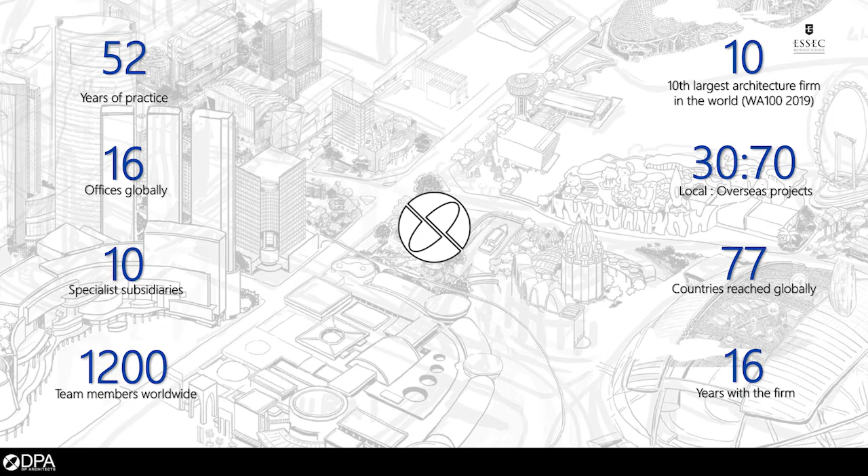So a firm of this size, in terms of reach and influence, close to 70% of our projects are actually placed overseas. I've been with the firm for 16 years. It's quite scary - sometimes you give this talk and start counting, and it's like, oh my God, 16.

It's incredible. Key part: these are our 3 key strategic pillars - design first, people partner, and one global studio. In terms of design philosophy, this framework allows us to look at design where we talk about the idea of drivers. You need leadership here, and with that, data is key. Then that starts to generate discourse, and most importantly, how do you master the tool?

Of course, we have measures in place to assess the impact of our projects office-wide. These are the people - I think it's important because behind every successful project, these are my partners. We have 33 of us, and these are the bigger family. This is a recent photo we gathered together to chart our way forward.

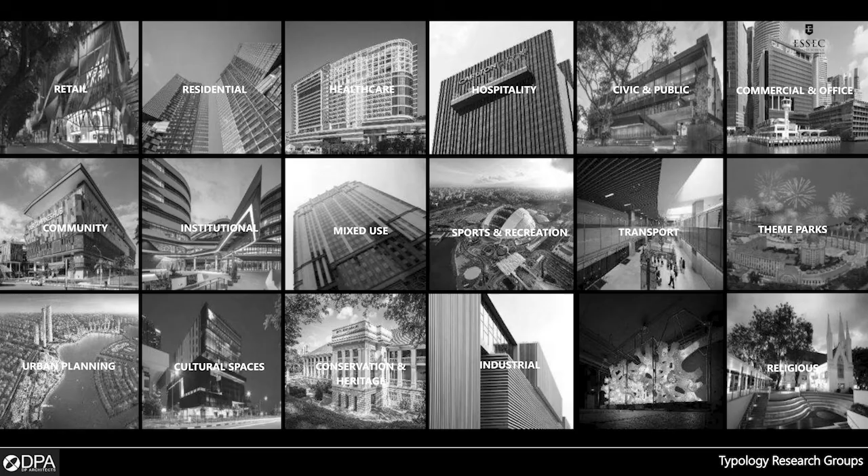I think it's important, as I said, to be multidisciplinary. It really echoes the importance of collaboration, especially in this day and age when we talk about design and the power of design. We have a whole series of expertise and typology - myself looking at sports and community, which I'll touch on again a little later. This is the footprint, but more importantly, the whole idea is to allow us to conceive from the notion of city all the way to the design of doorknobs and experience.

This is what we aspire to achieve, and these are our preoccupations now, which I'll touch on a little bit. These are also about a point in time for us to discuss how we look forward in terms of the few new decades to come - quite relevant subjects to many.

The digital part is quite key - this again is part of the foray by the office. But the very important thing to us, as I was sharing with Xavier, is it's not just about complex geometry, not just about the whole idea of programming intelligence, but most important of all is really that part of human dimension - the delight that this method allows us to create, work that actually brings joy to the users.

The other extension of me is SIA. I heard some of you have just landed in Singapore - this is not the airline, unfortunately, it's the Singapore Institute of Architects. I've also been with the institute as an advocate within the fraternity for coming up to 15 years. SIA in Singapore is the only representation of the architectural profession.

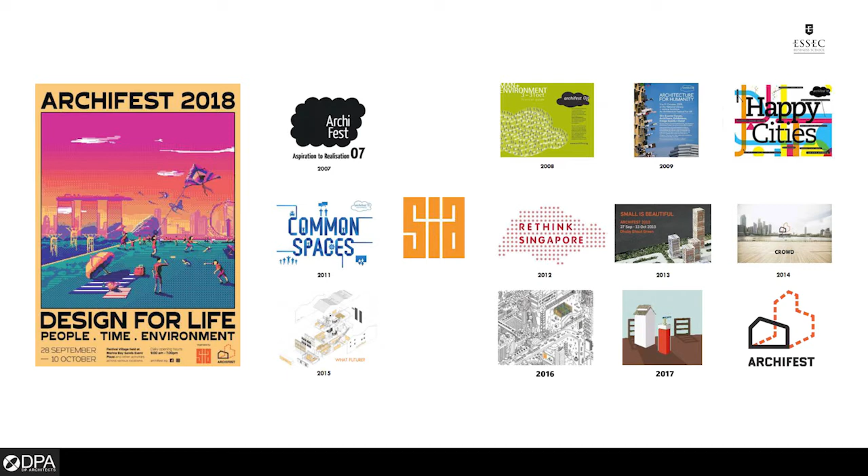One of the major events we hold for the city is its annual architecture festival - an event for us to celebrate and talk about the city, placemaking, and the community. These again are my council and team members this year.

A very important part to us is talking about the roles of architects - the relevance of how we communicate, not just amongst ourselves, but with all of you, whether in terms of business aspects or even just the man on the street - the idea and value that architects bring. Typically people will associate architects with design as the foundation, the technical skill set, and the part where we are agents to the state, talking about laws, public safety, public interest, and aspects of administration. But in SIA, we believe there are greater values where we deepen the conversation to discuss economics.

Architects are slightly different from, say, a cost consultant - we don't just talk about cost, dollars and cents. We like to discuss the values we bring to the table in terms of design. So that's another level which is important.

Environment, obviously, is quite key - the built environment or buildings itself attribute close to 11% of embodied carbon. So this is a very important part, and social is definitely the basis of our action. But most important of all, and very key - I would say this could be one aspect of this exchange that is very important - is actually the part on integration.

Because we need to make sense of all this requirement from client's brief, their budget, the kind of codes, the laws, the compliance, and all this kind of ethos, and make sure that we create something that is legible, that's habitable, that's also something that people will find joy in using the space. So this is one key aspect that is fundamental in terms of the roles and values that we bring in.

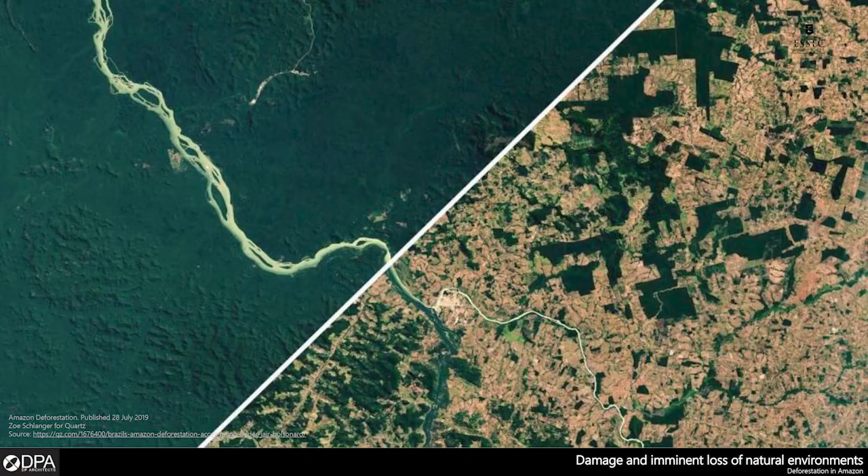So the kind of impact human behavior is having on the Earth in the years to come is major. Of course, comes with that is the heat that we are feeling, literally. In the Paris Agreement, we know there's a target to meet. And I thought one of the key messages that some global leaders haven't gotten is, regardless of what we are doing, the temperature is going to rise.

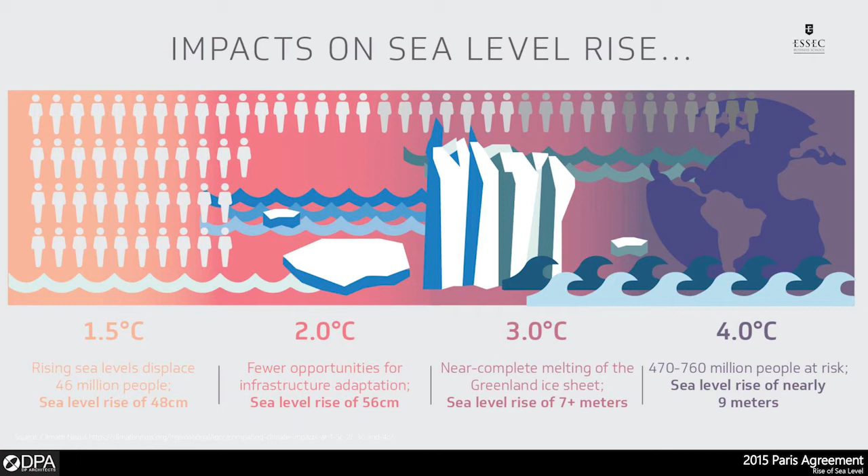And the idea is, if we fulfill our targets, minimally it's about 3 degrees. That is scary, because what is temperature to us? Just to give you a sense, when we talk about 1.5, the target by 2050 is to keep to about 1.5 degrees. We are talking about affecting 46 million people displaced by rising sea levels alone. So can you imagine when it hits 3 degrees, the kind of impact on the global citizen is phenomenal.

So, very serious subject. But back home, we are also aware that there's a change in the mix of demographics. I don't think it really applies to this group yet. The idea is, currently 1 in 8 Singaporeans are above 65 years old.

In 2030, it's 1:4. All right, so maybe if you add another 30 years, I think still there's a gap there. But it's real, and this is a key conversation we need to have in terms of the challenges with that graying population. Digital is key.

And of course, when you talk about 2050, there's always the part on new intelligence—beyond AI, the kind of communication, the whole notion of connection, human interaction. But coming back to even the present state, this whole idea of technology, the whole idea of hyper-connectivity is already creating an issue. We are ever so connected, but yet not present.

So this whole idea of isolation, of alienation in relation to the advance in technology is already something quite real. And worse still, there are figures, national leaders, talking about archaic methods of further division and divide. So these are really serious issues in terms of context if I'm addressing future global leaders that we are facing, besides that part of excitement and positivity.

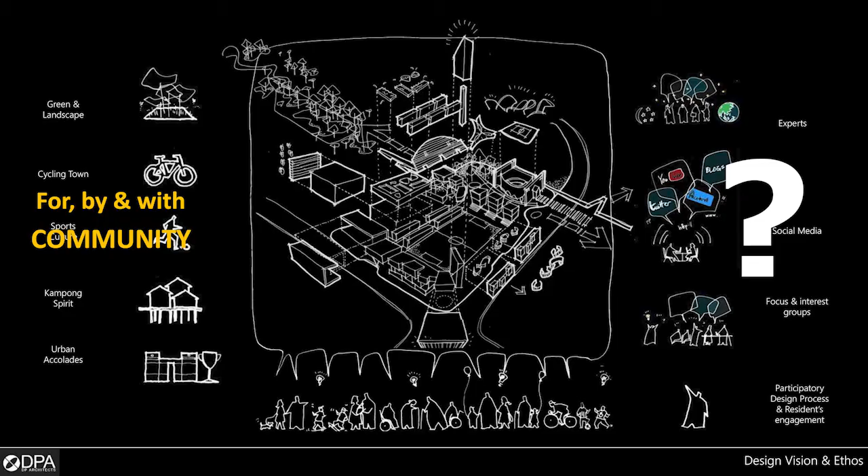So this is the grand opening, brought all the residents together. Usually, the idea is VIP, you invite ministers, some politicians, but this is where the residents become the focus. So there is already a very intentional way to shift away from the whole idea of how we start creating a community space of this nature.

And of course, there's a whole host of engagement, very intense. We went through one year of very intensive engagement, from roadshows, you see typically in some of such events, all the way to block parties. Block parties - you know, we stay in public housing, so it's by per block - to even floor parties, going by per floor. So very, very fine grain.

And of course, there's interest groups, focus groups, social media websites, forms of engagement. This is really showing the evolution of how, in the end, eventually the hub was conceived.

It's interesting, when it first started, the project was about 4 stories - just to give a sense of density. But after various engagement, it started, I think, with 7 agencies. Everybody wanted to come together, so it just kept building.

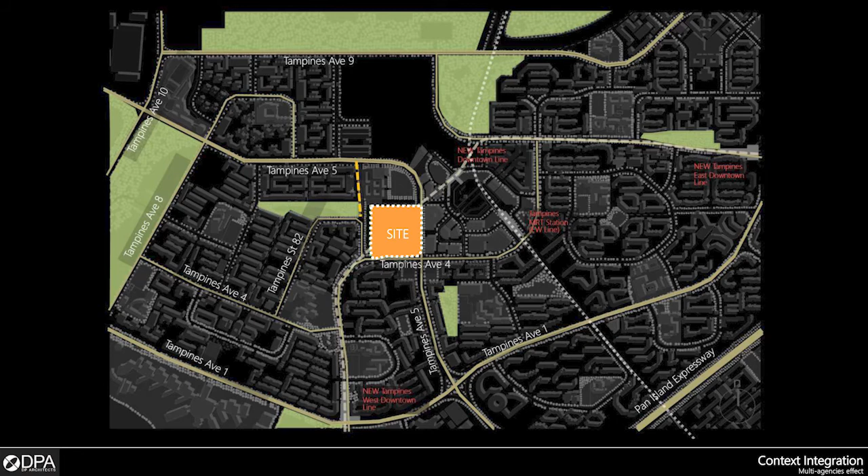And of course, we shared about how it operates not just as a site, but understanding the whole entire network. It has a main space, all right. One of the key focuses is how it talks to the town - it's on porosity. This whole idea of an open ground floor, or areas on ground, given priority to social or community programs.

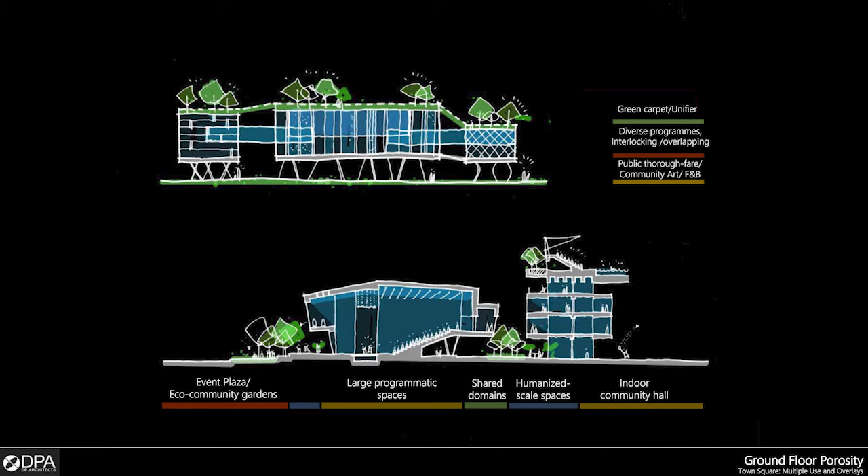Because when 12 agencies come together, it was quite difficult - everyone wants a ground floor entrance, naturally. When you have 6 stories, they say, no, I want the first story. So in the end, none of them got the ground floor. Most of them got the second, and we worked based on the community's focus angle.

So the idea of the ground floor is only for social programs or primarily for the community. There's some retail, but in terms of retail footprint, it's about 15% of the overall floor plate. So that itself has already shifted from the typical idea of maximizing commercial interest and frontage.

And interestingly, I think this is also a kind of human behavior. In several of the engagements, many of the residents in Tampines shared, can we not see another shopping mall? Because actually Tampines Regional Center, if you visit the place, has a lot of malls already. So their first instinct, they know this is big, they say, hey, we want something quite different, the whole idea of big space versus something intimate, idea of flexible usage.

So the first event was actually, the whole idea of the square is part of a FIFA 2-star football pitch. They have massive yoga, of course they have clubs, they even have a concert, the first concert out of a city center within the heartland. The idea of how it works as part of the city was very important in conception.

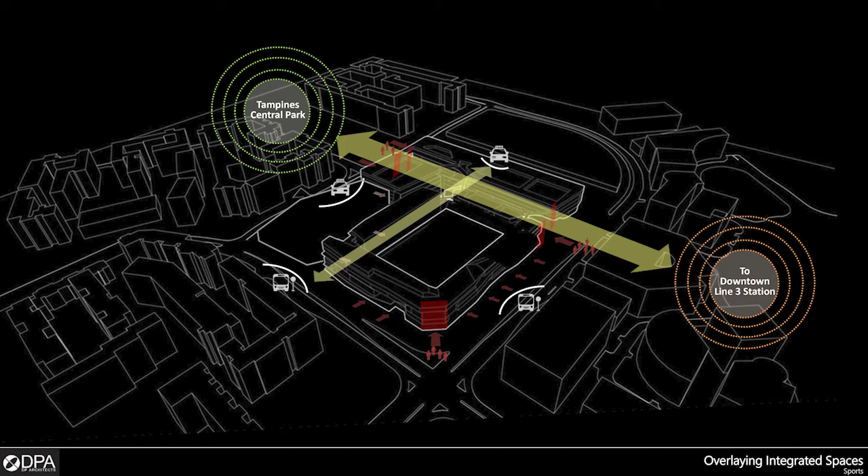Again, how it works, it brings the street into play. There is a main street that connects the downtown center to the central park within Tampines. So this is the street that we create, sheltered but naturally ventilated. If you have a chance to visit, through different digital means we are able to simulate and make sure that this environment is conducive, even without aircon.

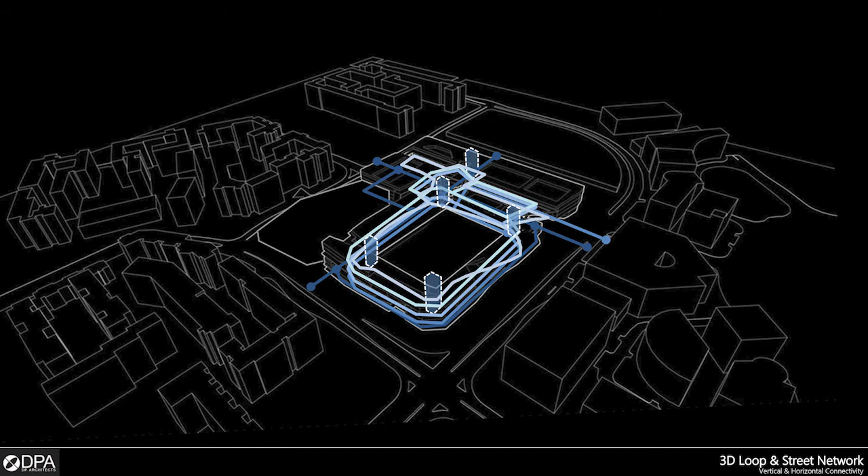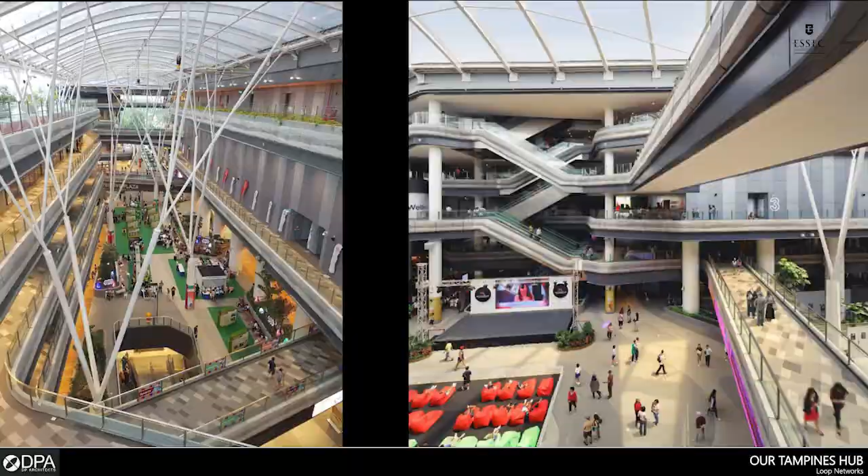So the idea that it captures various movement and in fact segments of life is something we thought is quite powerful. And this whole idea of movement is multiplied 3-dimensionally as a whole array of network throughout the entire site, of link bridges, of connectivity that strings the various programs together, right into a plaza space in the center.

It's a combination of various diverse programs. There's civic, cultural, arts, there's community, sports. So within the site, this is really the whole idea of creating not just a place, but a place of many places, right? And these are the whole host of programs right under that.

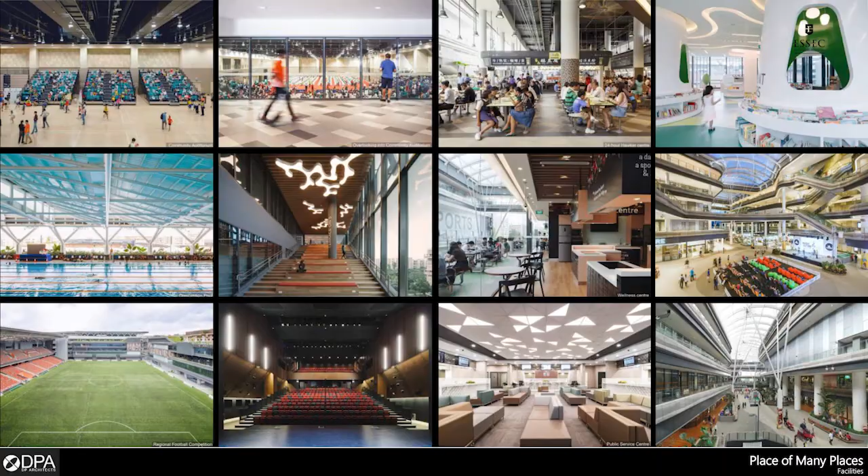And in spatial form, this is the kind of environment that we need to create, quite bespoke to each of the segments or the user group. But very importantly, the whole idea is not just to look at them in isolation.

In design strategy, we move away from the typical stacking of floors and look at 3-dimensional clustering of facilities so that we maximize dialogue, to say that even in this room, I'm quite aware of what's happening next door. So what we believe is by maximizing spectatorship, you also encourage participation.

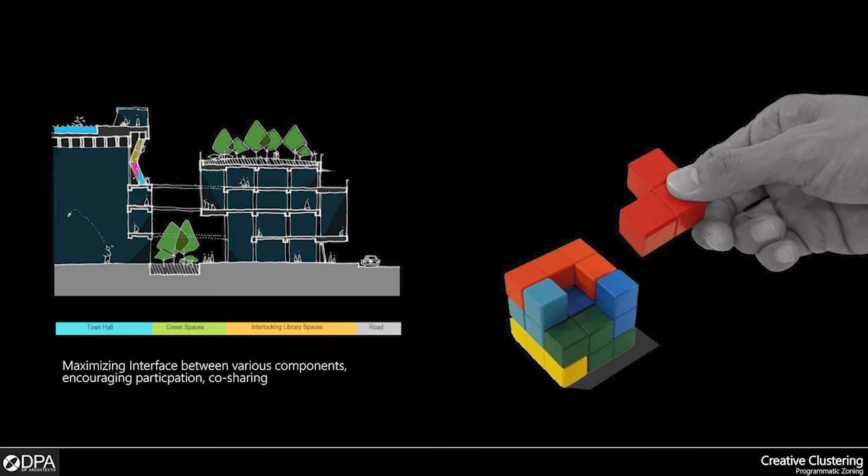So the whole expression describes this 3-dimensional dialogue. And in a spatial way, as I said, you're constantly aware of what's happening in the other spaces. This is also quite key.

So the whole idea of various spaces that we're creating, this is where we brought cooking right into the library, all right? Because we think that you can get your recipe outside, but this is actually a space that doesn't belong to the library stakeholders.

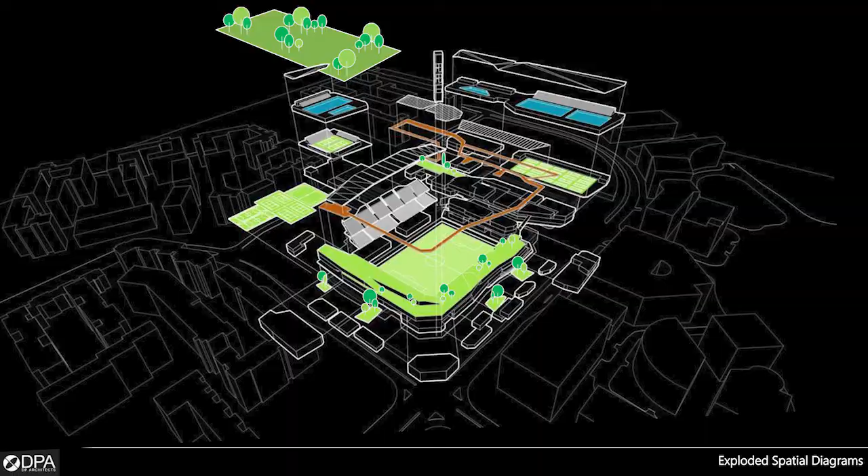So this whole idea of synergy is taking place, bringing green. So again, a whole assemblage of this idea of environmental system, the users of spaces, rooftop jogging track, rooftop pool, and then very importantly, through this integration, it also allows us to harness the system as a closed loop, where the solar energy from rooftop can be used for the basement car park, and the food waste is converted to fertilizer that we can use for the community farm.

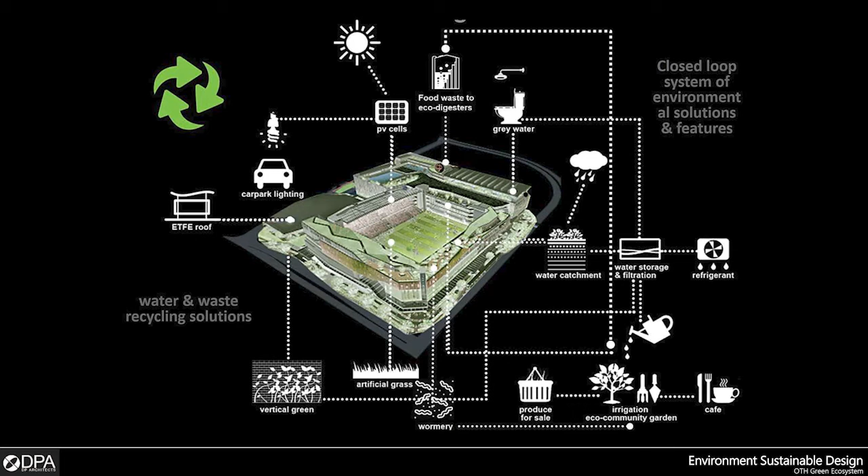So hawker center, key space, so some of the simulation, so quite a fair bit of technology is embedded, not just in terms of the design, but also the operation, where we talk about food waste converting to fertilizers, all within that space. So the whole idea is once that purpose is set in place, all the kind of support in terms of technology starts to make sense, right?

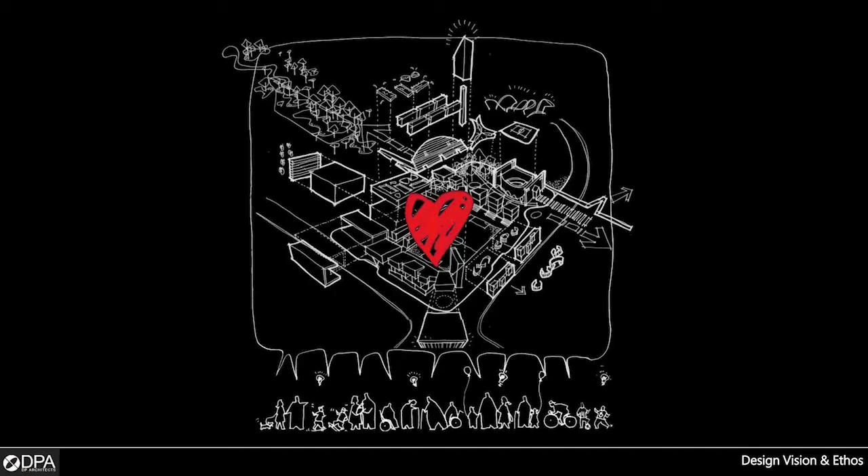So in terms of various manpower, lean or productive methods, robotics, and even performance-based approaches where behaviors are analyzed to help generate further data, the key thing is really going back to the people.

The whole idea is not just physical gathering, but social media too - the cool part is it has a lot of participation. One of the most encouraging things since its opening is that each year, last year, it saw 18 million footfall. So in Singapore, 18 million to a community space is equivalent to an airport.

Very interestingly, based on usual statistics, in most of our community spaces the minority races, like our Malay community and Indian community, are very low - 2%, 7%. But here in OTH, it went up to combined more than 40%. So it's starting to change behavior. This is where we talk about that synergy of 1 + 1 can really become more than 2.

And the latest, it was quite funny - we talk about the concert. We even had army boys, first time, not within the camp, but they came out of the camp to the community for the passing out. And then, of course, Ronaldo was here, but he only had 300 fans. This is the man, Ip Man, if you watch the movie - he drew a 5,000 crowd, the whole space was packed. So the whole kind of diverse inclusion of activity is really what this infrastructure supports.

And this is one of the key ministers behind this project. He says that the project itself really starts when the building completes.

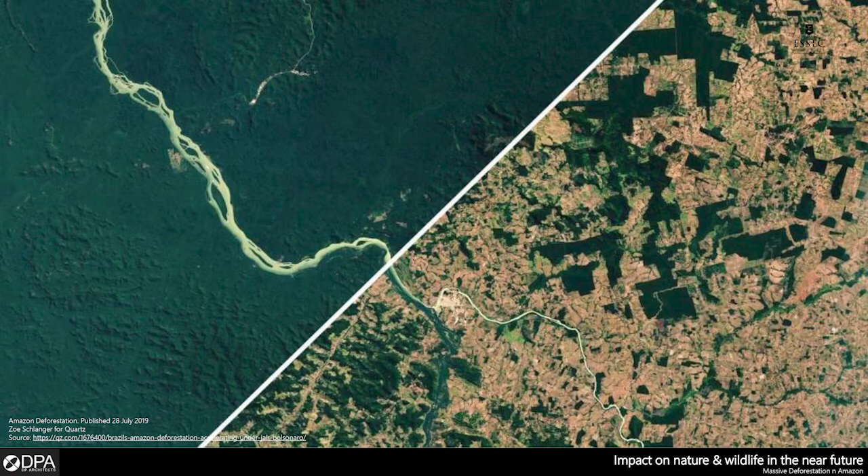And then, as an extension, there's another hub we are doing - we talk about the issue of deforestation. In Sembawang, a hub of a totally different nature is also in the planning. This is within an 11.7 hectare site of an existing park, so we were told to look at an integrated hub too, but in this case we can only build up to 2.5 story height.

So the idea is respecting the topography of the hill and the existing trees. Within the building there is also a national monument that used to be the House of the Admiral during the British colonial days, which has a vantage view towards the naval base.

Quite an incredible project. So again, it allows us to start questioning the potential of how we look towards the future, with the knowledge of the past and the current, really how it allows us to start discussing what could be, and bigger subjects like the divide of what's green and what's hard, or the city.

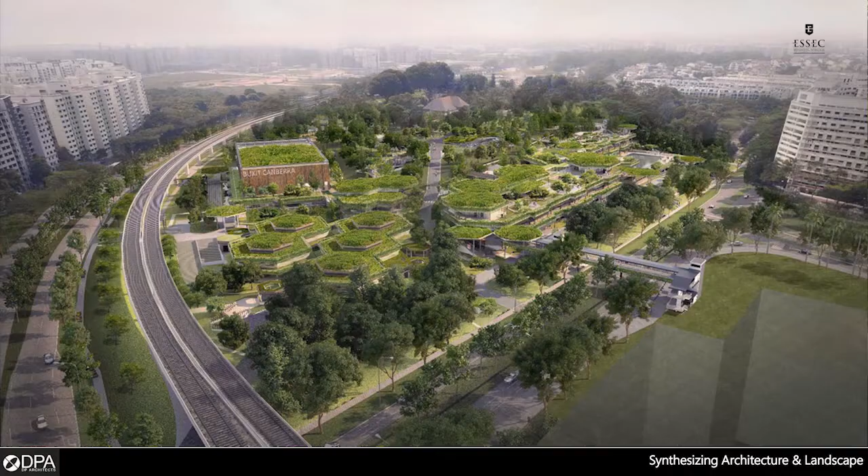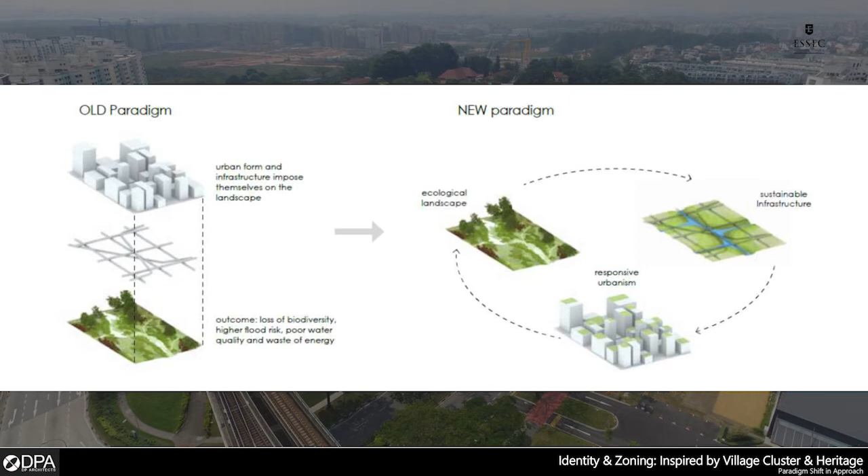And this is the result of that imagination - it's called Bukit Canberra. The idea is really creating, again, not just vibrancy but accessibility, while keeping this whole park setting. I would say the major paradigm shift is: instead of taking a building and putting it down then planting all around it, in this case you start with the green and plant the building around the green.

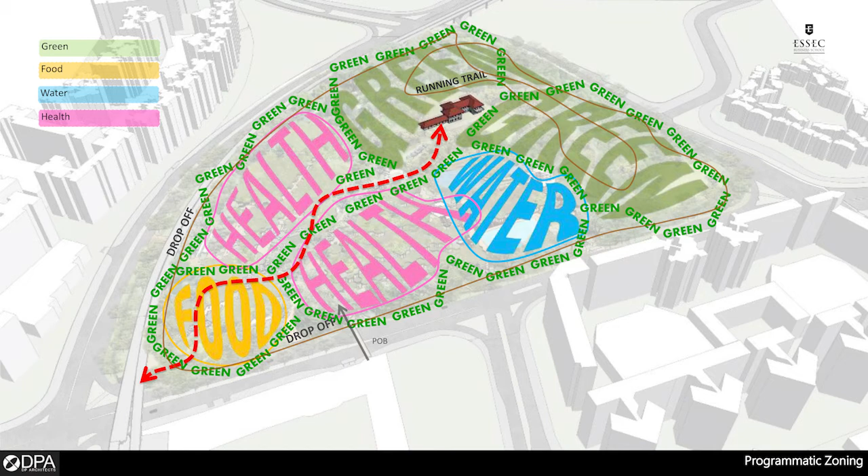So this is the site looking at its larger impact in terms of the larger green network. And within that, program is key - 4 key programs. Green is already the basis, the asset, with the idea of bringing water, health, and food. So the idea is a program creating various clusters, not by agencies, but more by use and nature.

So there's a hawker center, the idea of a pool, the notion of even a polyclinic, a healthcare center for seniors, and the idea of even farming and outdoor space. So the idea is creating networks not just for human enjoyment, but even for butterflies.

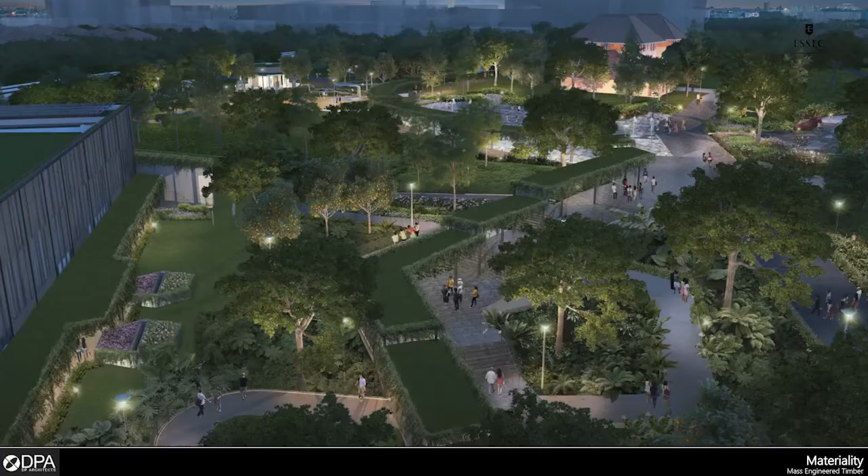So this was our task - trying to retain the trees within the site. And then, of course, the building footprint itself is 100% green replacement - whatever land we take, we replace with green.

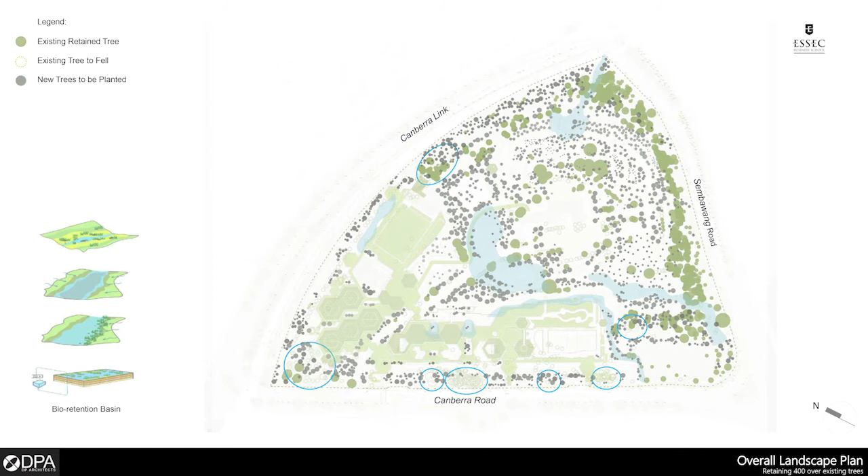And then water, and very important, replanting. So we are replanting 1,600 trees back to the site, further intensifying that kind of green. And of course, with that, key thing related to this, it's really the whole kind of setting that we create for the community, but also the larger biodiversity that it starts to generate.

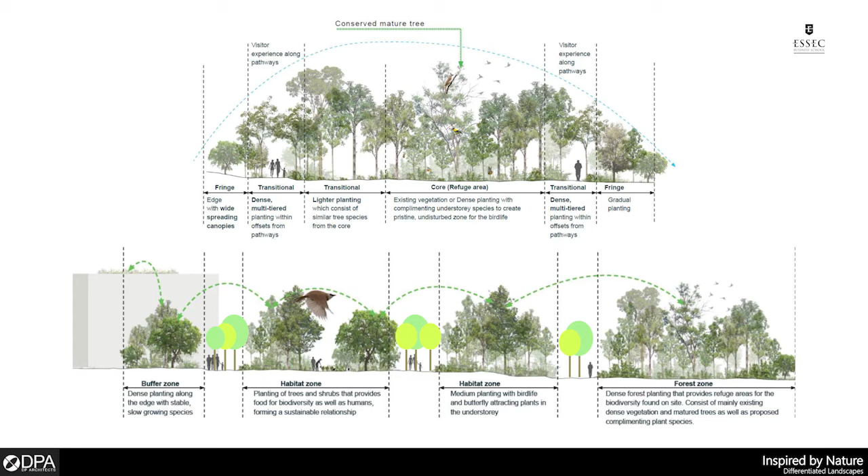So the idea of each of the layers and stratas, and then not just where the site doesn't have buildings, so the building itself also becomes the infrastructure for all these different species to continue to grow and kind of evolve. So geometry-wise, we took on something quite different.

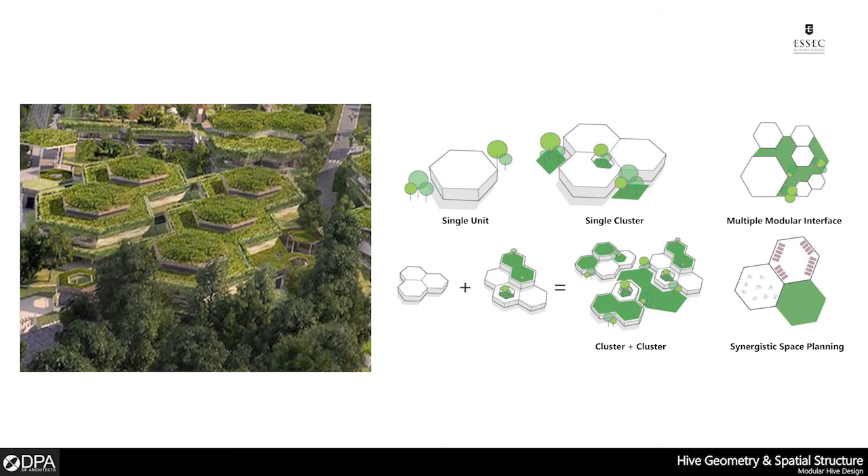The idea notion of hexagon, which is also a geometry from nature, actually works well for more interaction. Exactly like this hall. This is me and you, but when we create a spatial setting that is different, you create multiple interfaces for dialogues, right? So this is the building in place. Hopefully it will turn out like that, right?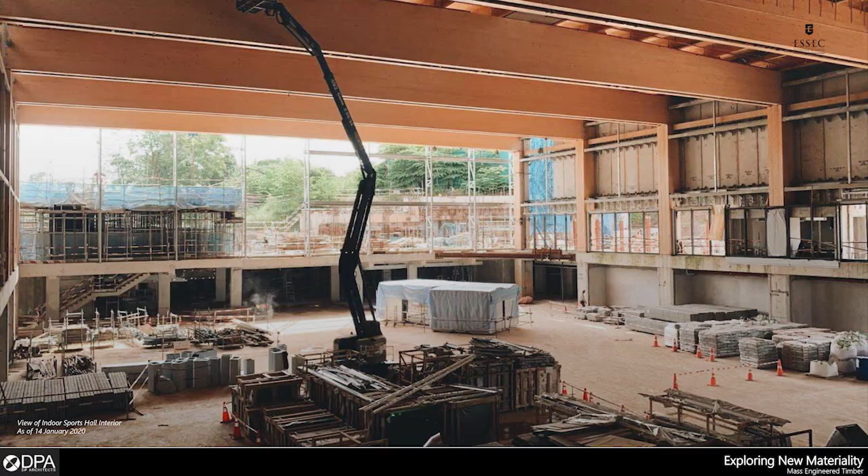So one of the key gathering space, important thing is also in design to push for new technology. This probably in France, it's common, but in Singapore, this is the first few timber building. Here we call mass engineered timber. Of course, construction ongoing, something quite cool.

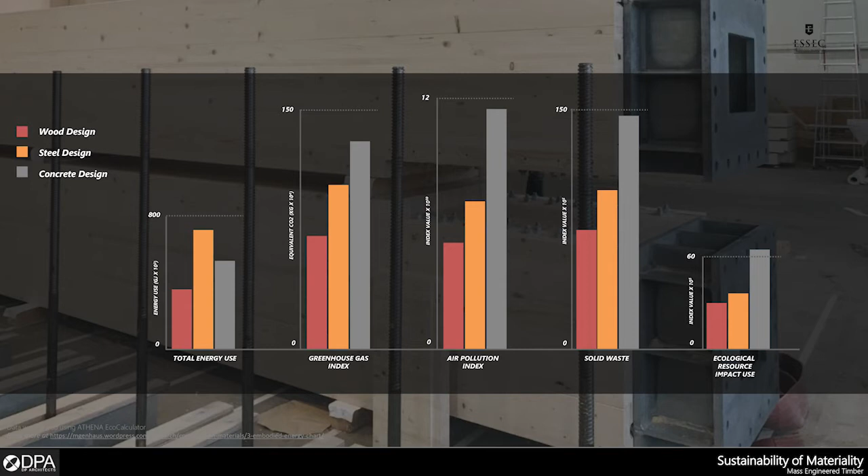Itself, I think in materiality, in terms of its energy consumption, greenhouse emission, pollution, it's one of the most sustainable sources. So itself, it's also this foray for us to go into the discourse of what's the kind of right building material to cultivate the kind of value to the community. And technology has already proven that towers can be built with timber too. So not sure next time when you visit Singapore, you'll see a timber tower.

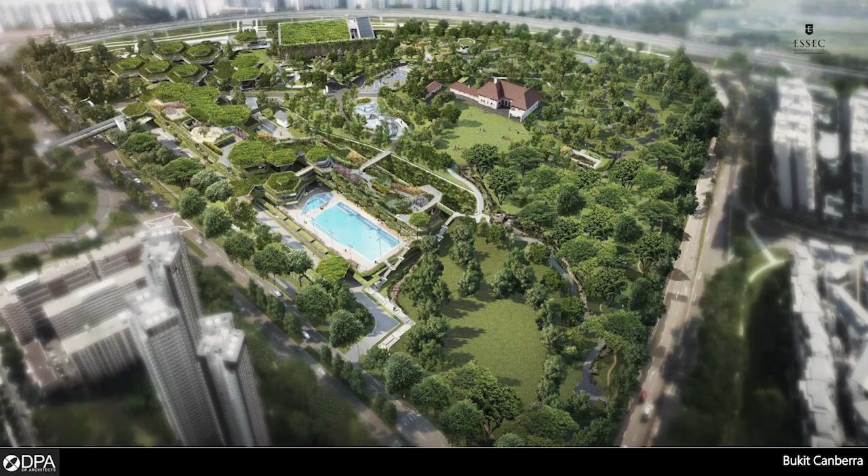Of course, biodiversity is key. This is really the ambition. This is during the competition what we put. Year zero, we create a building, but create the infrastructure for the greenery to start creeping in. And then of course with that, right? And then really coming back to the community.

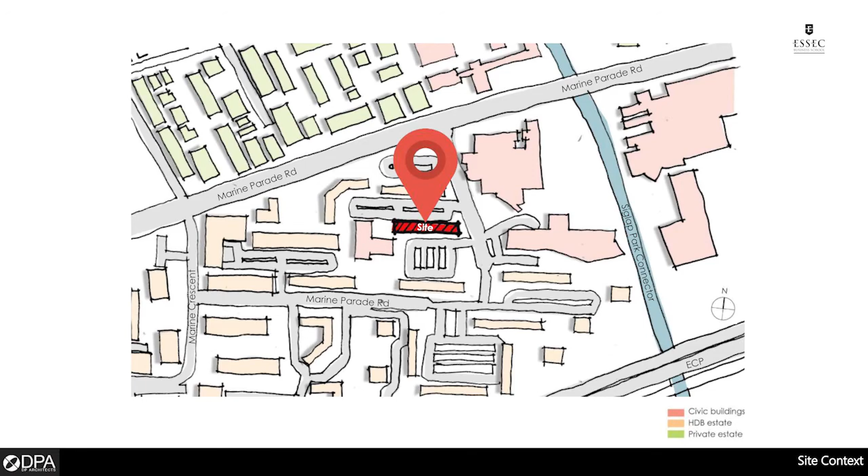And then of course there's the sad case of suicide and issues of them kind of passing on at home. Key thing was also questioning a social welfare kind of method, where many of these seniors, there's good intent. They bring food to their house, all right, they give them pamphlet. But the issue is then they don't even need to step out of their house. This is where design, we need to look deep into the subject, all right, of what the whole concept actually address.

So this is the space. Idea is really true, very important, the agency of food. So something I hope you enjoy in Singapore too. All right, bringing the community together.

It's really true that to shift the perception or the role of these elderlies from object of charity to stakeholders and leaders. So here, they are not just given food. They are the one who prepared the food for one another. So you're instilling a role in terms of just the design of a simple center.

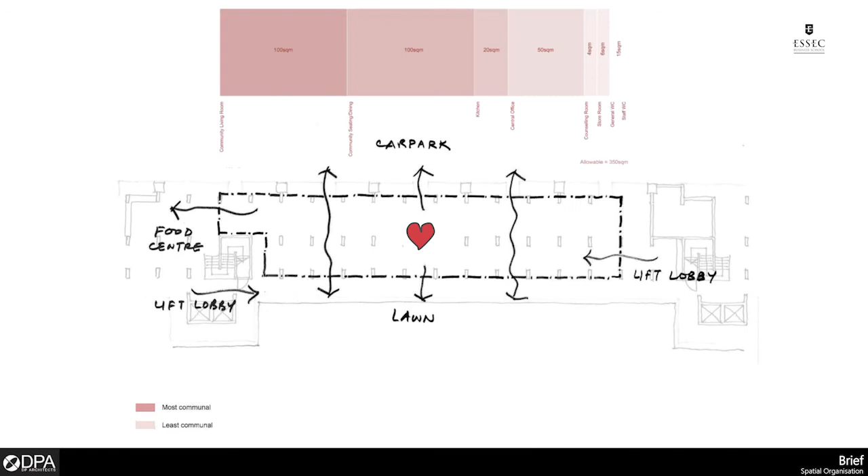So in design, porosity is key. In the center, that's where we place the kitchen, where all the activities revolve around. And then the whole idea that, you know, most of the centers, I'm not sure in France, how is it like? It's either glassed or gated. So it's a bit like fish tank, you know, but a different context, fish tank has different connotation.

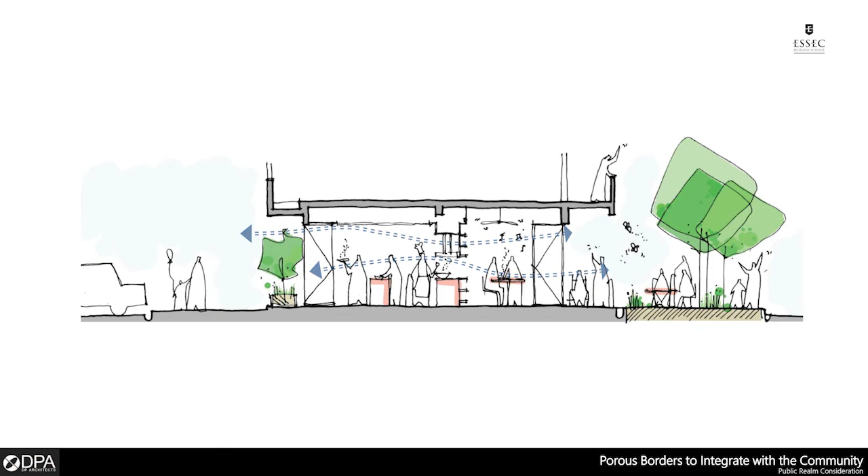So the idea that, okay, we wanted to break this idea of definition of threshold, and the design inject a whole series of doors as the very facade. So the facade is designed as an array of doors that's all open, and it creates this notion of porosity right through. And this is where the common area and the specific area are.

So this is where you start to blur boundaries and you dissolve stigma. Otherwise, you'll say, hey, this chap going in, maybe they will need some help. So the idea of how we blur the boundary is key.

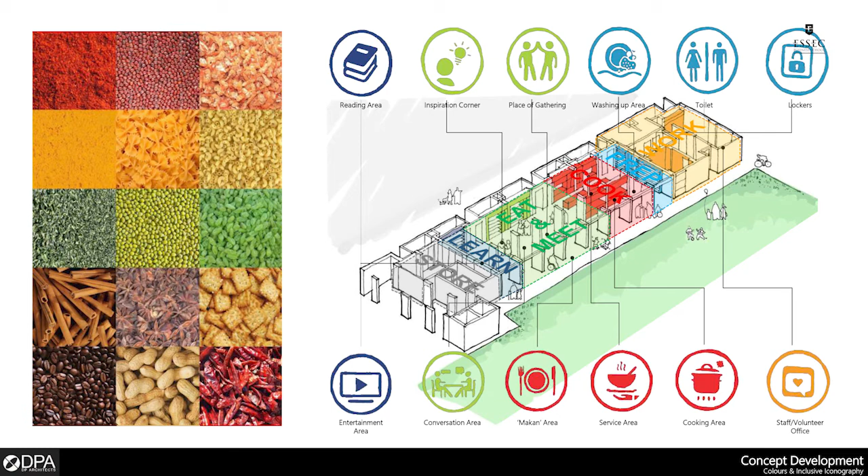So how we communicate - this is always a story I love to tell about Uncle Louis. When we first conceived the idea with the client, a social welfare group called Montfort Care, they went to Uncle Louis and said, Uncle Louis, come down, let us help you. His first, of course, natural answer was, no, I do not need your help. So after the design idea further germinated and progressed, they went back to Uncle Louis and asked him, Uncle Louis, can you come down and help us? He said, yes, I'll do that.

So the power of design in instilling ownership, the whole idea of leadership, and the whole idea of dignity is fundamental. The cool part about it is I'm currently working on version 2 of Good Life. Something fun, just a snippet, is looking beyond the center at how you address community support and the whole idea of future aging in place. Many seniors will go to a nursing home, but part of our hypothesis is that if the community has enough support, you can create a robust support system that allows many of them to age in place.

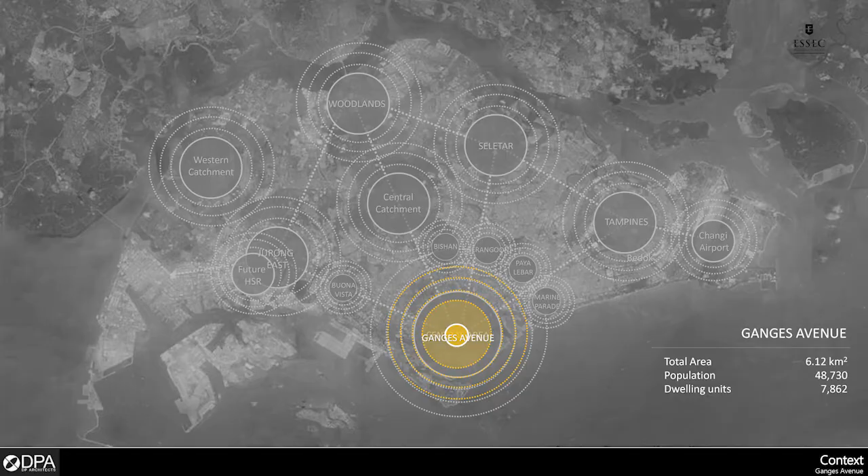Another group, from old to young - this is what Professor Xavier talked about, a youth charity we're working on. It reaches close to 1,500 youths annually. We went to see their building, not as beautiful as your campus - many of you, if you come as a youth volunteer, will know what your first reaction is. This is an existing commercial building by our Housing Development Board; they gave them a unit. So we went in to see, and this is the space that we had.

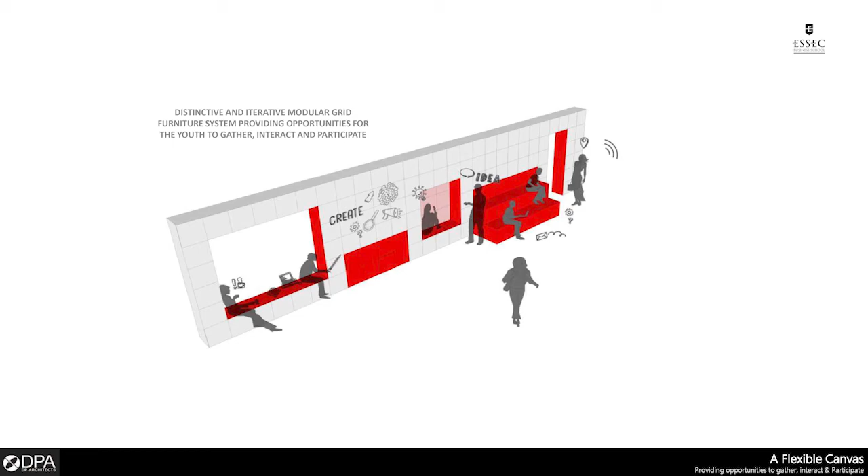So we thought, using the concept of building blocks, we could develop a system that creates a whole palette for the users to start shaping their own environment - empowerment through design, with a whole array of language tied to their values and principles to create a new environment for the spaces.

So the foyer space, coming back to their so-called training room - in the brief it's a training room, but we said, why don't you create a big gathering space that you can close up and allow participation to take place. The idea of these modules sets the basic framework of the entire space, with a lot of walls for dialogue. These are actually sound absorbers for acoustics, but we designed them as origami that carries their idea of logos and principles.

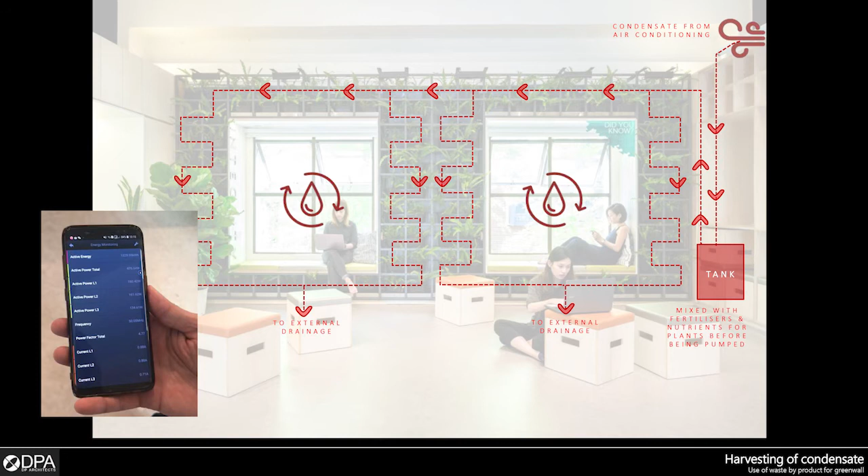In terms of green space, each of the youth volunteers is supposed to adopt a plant - the whole idea is that through a space you cultivate a behavior, and then teach them and impart values of life. Part of the system, because the budget was very low, we innovated to take aircon condensate and collect the water to water the plants. We also worked with a partner, ABB, to digitalize the systems so they could track their own real-time consumption of energy. So it's the space itself, the setting, and the community coming together.

Last project - in terms of reimagination, I think this is one of the smallest projects here. It's at Jurong East, the western end, and this is what we call Project BS - not that BS you know, it's Project Bus Stop.

Important, I think a key idea here is really looking at the future discussion of mobility, which is quite scary. Based on data, coming back to our idea of 2050, in India alone they are constructing 40 kilometers square of road daily. So by 2050, I saw one number showing more than 3,000% increase in road for vehicles. So this is real, as we talk about the evolution of technology and transportation.

Part of the studies here was this very interesting scenario in Nigeria, where close contact between humans and this machine of transportation becomes something we thought about. Even when you talk about conception of the future, the idea of man and machine in terms of movement and mobility is always close in discussion. This is where we really look at how community or social participation can be a part of changing the way we understand transport infrastructure.

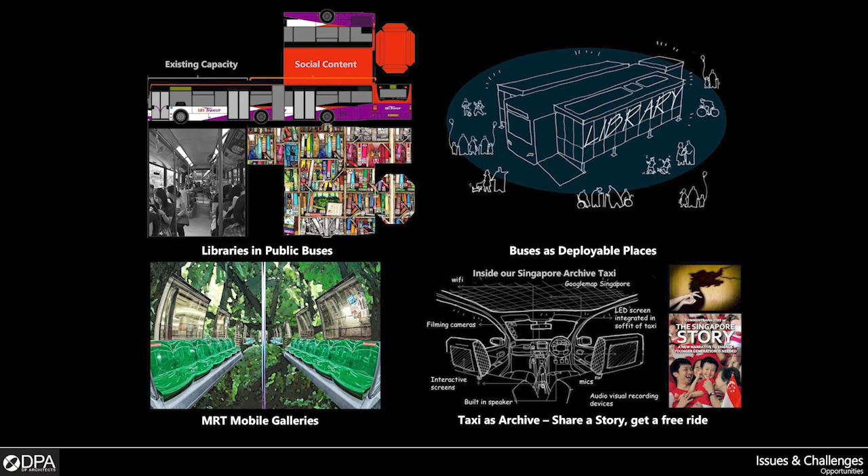It was a whole array of exercises that I did with some students. I said, okay, let's test bed what are all the things we can do in terms of future transport. The idea of adding libraries to it, allowing it to install on site, converting it to a gallery, and then maybe even doing game shows where they share stories.

With the agency, they gave us a site looking at a bus stop. So whatever happens, one thing will never change, even at Grab—when we talk about future transport, the notion of time is critical. So to us, the main exercise was how can we make that part of waiting, which can be quite excruciating, into something that could be quite delightful.

So a very simple exercise, and this is looking at impact. Daily, close to 4 million Singaporeans travel on the buses alone—actually the figure has already exceeded 4 million. That is our target users.

And in terms of sites, we have close to more than 4,500 bus stops. So this is our whole concept of site, not just that one bus stop we are looking at—this is all the bus stops around Singapore. This was originally what the bus stop was, and the whole idea of the reimagination is taking this, introducing various components and recreating it as a kind of social landscape.

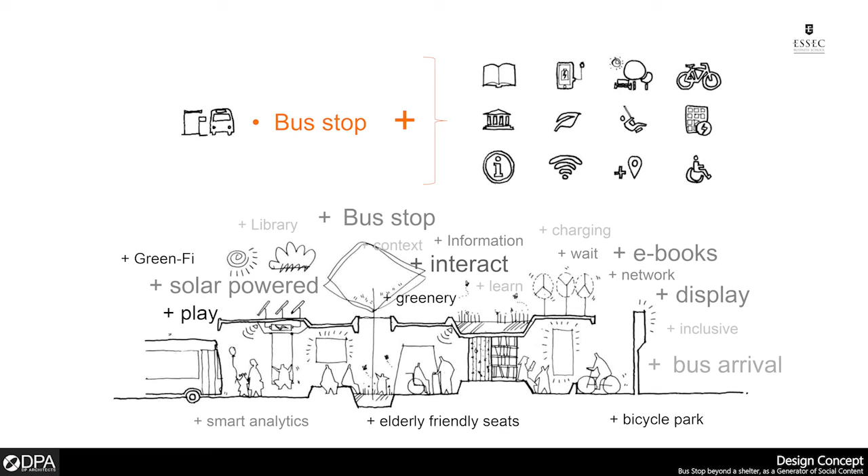So you inject a social dimension into something you typically see as just a tool. Of course, the things that come with it—this was a prototype project that they tested for a year. Unfortunately if you go there now you can't see the bus stop anymore. It's about looking at a kit of parts, how we attach various components, test bedding it, and allowing it.

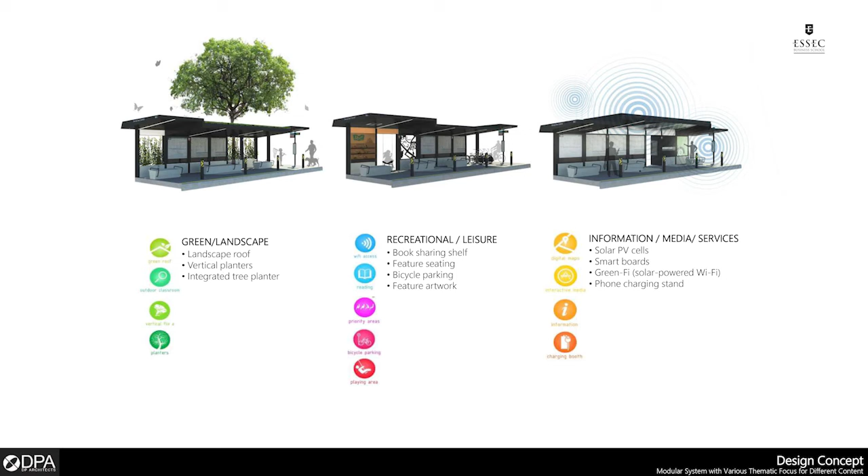What is quite key is it allows you to create your own kind of bus stop. Say if you're in a park, you can bring trees, rooftop garden, all the way to something a lot more media focused. This kit of parts allows the community or the residents near the area or district to really partake in shaping it.

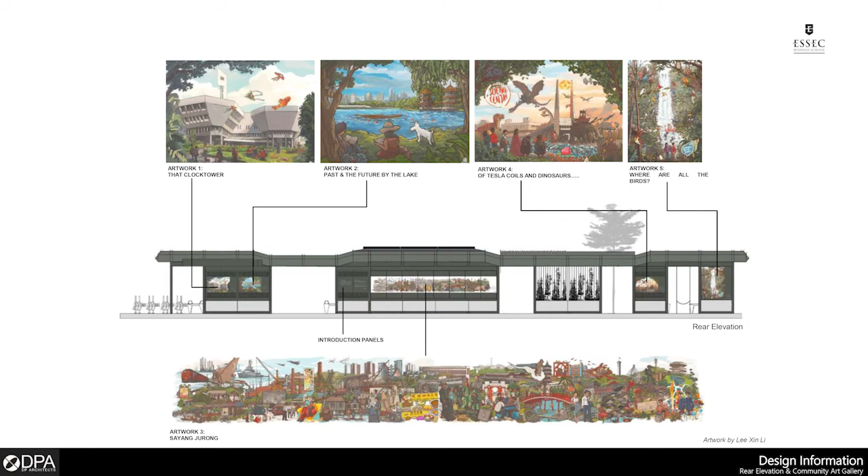So this was solar cells, and there's Green-Fi, solar-powered Wi-Fi that we were test bedding. There's also a mural done by local artists to tell the story of the site, and real-time intelligence in terms of bus movement. We even brought a library to allow sharing, but there's also e-books within that—so there's a physical experience coupled with a kind of digital enhancement of that enjoyment.

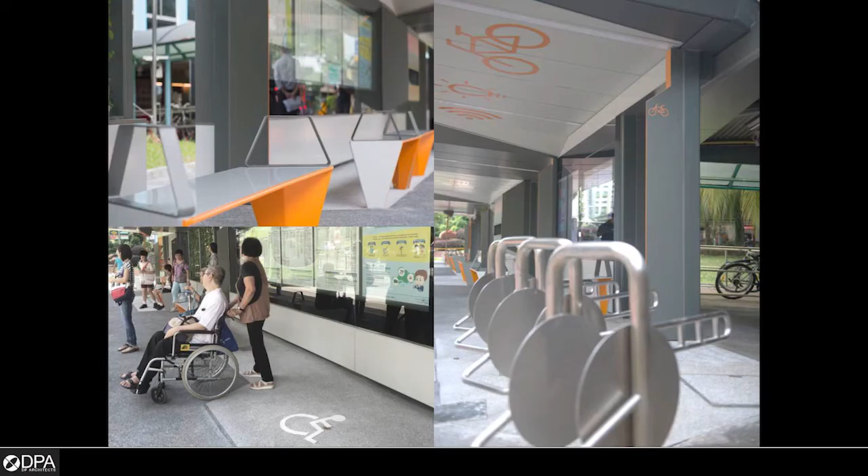So these are the various kit of parts—this was, I think, 2016. The phone was still charging that way, but that was the idea. You could see the various users working with it, looking at universal access. What is quite delightful is it started a whole conversation, not just locally but even globally, about the importance of looking at bus stops as an extension of your social spaces.

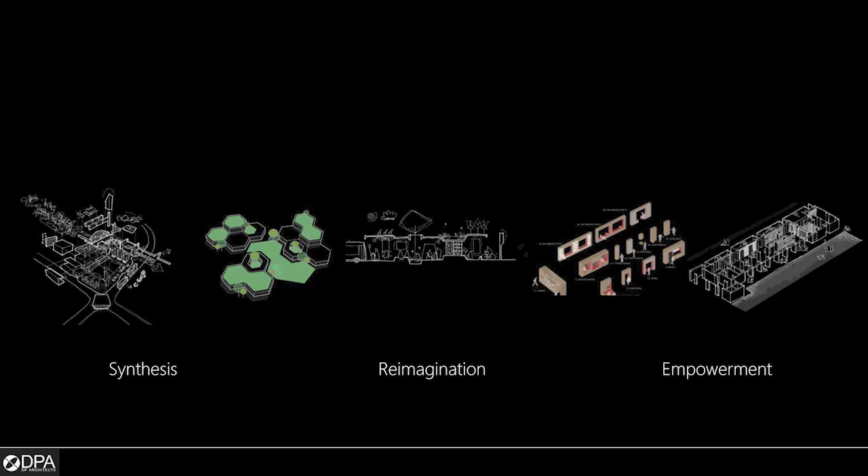And then, of course, the swing. This is a summary of what I shared in terms of harnessing the capacity of design in synthesizing all the various dynamics, looking at the way it allows us to reimagine our setting, but most important, going back to the human and social capital of empowering the users, across the various spaces we talk about.

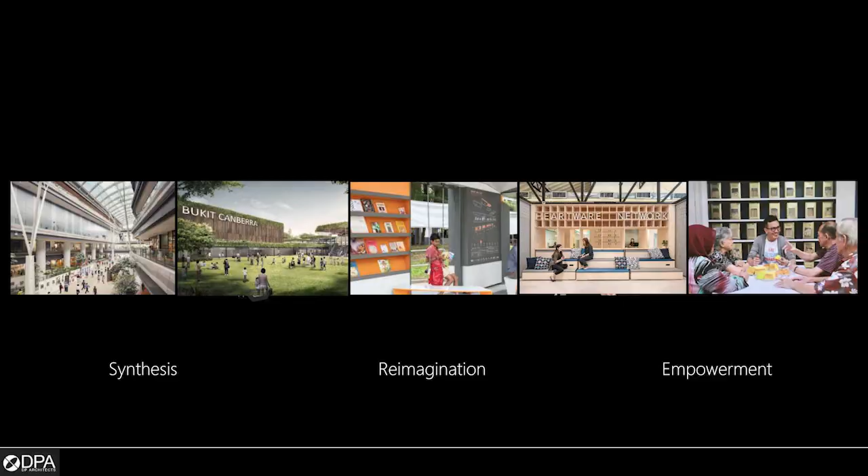What is actually quite key is that beyond each project—say after Our Tampines Hub is done—it started driving the emergence of various integrated hubs in the landscape of Singapore. So the project itself, in terms of impact, can be much greater than its own.

In terms of bus stops, there were various discussions, and other versions of bus stops started to appear. Even buses started to emerge. And within the idea of void deck public housing centers, after Good Life Makan, a whole array of different community-based support networks started.

Coming back to this whole idea of future setting, it's really about understanding not just the past, but the present, in order for us to purposefully chart our path towards the future.

I thought of closing with this project in terms of the NDP, where we talk about that kind of dream, ultimately anchored by a symbol of sustainability, grounded back based on human values. The whole NDP show was inspired by a letter.

Earlier I started with a quote by Mr. Fuller. This one is by a very distinguished figure here in Singapore, Professor Tommy Koh, who wrote a letter to his grandchildren in the year 2065. He talks about what is key in terms of us looking towards the future.